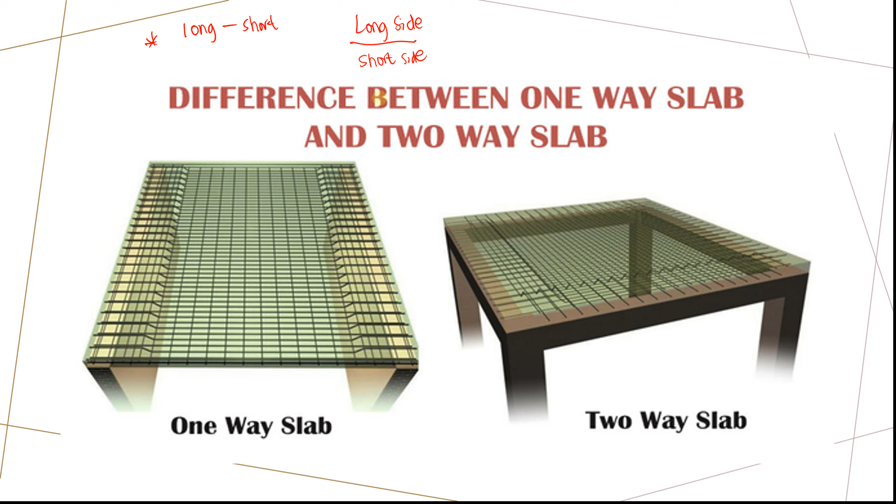If ang long side, divide nimo sa short side, and then the result is greater than 2, then use one way. Or kung imo ning balihon, no, the short side divided by the long side, and then if ang result is less than 0.5, then use one way. Else, greater than 0.5, then use two way.

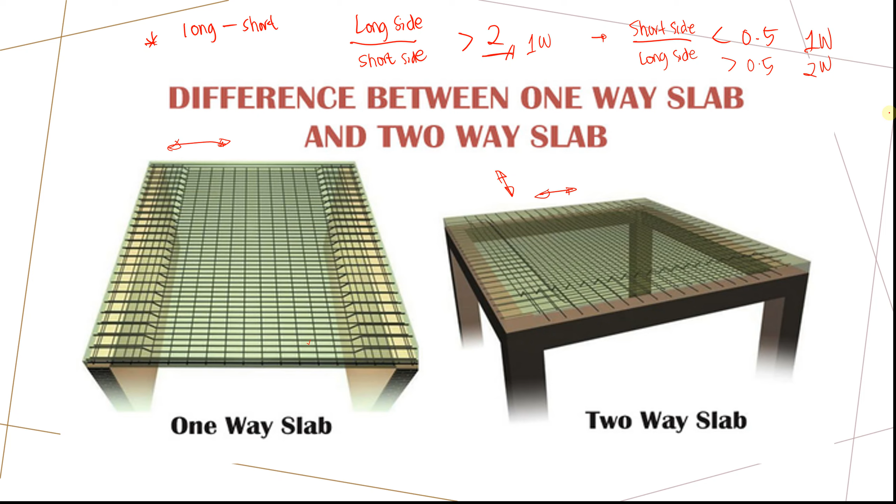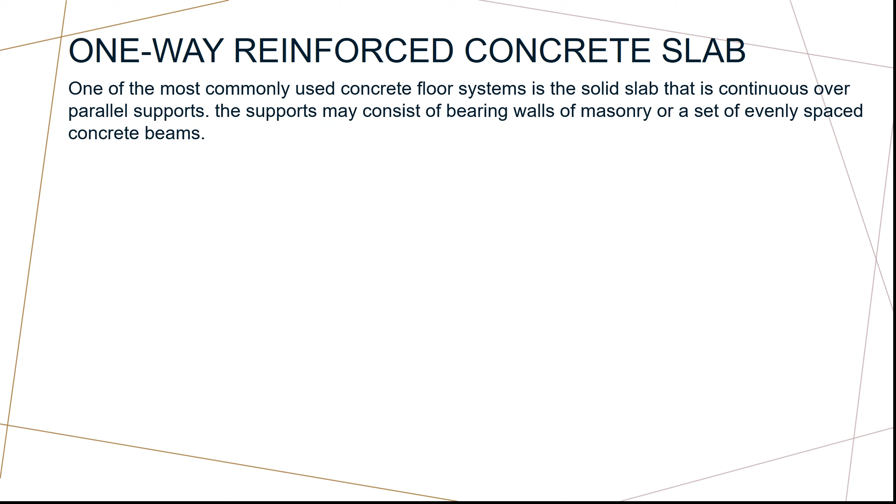Mao na ilang kalainan. So one of the most commonly used concrete floor systems is the solid slab that is continuous over parallel supports. The supports may consist of bearing walls of masonry or a set of evenly spaced concrete beams. So mao na siya ang itsura, no? This is a one-way slab. Example, this is the section view, and then this is the detail plan or the plan view.

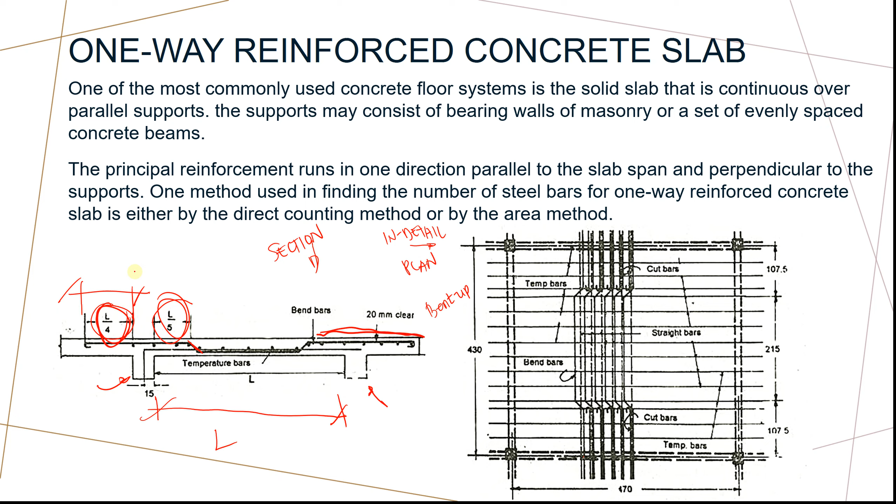And then what else? Temperature bars. So kani sila, all throughout the length, perpendicular to the direction of the main bars. For the one way, ginatawag nato og temperature bars. Tapos as you can see, naa'y beam diri, mo-extend ni siya diri. Ang length of extension is L over 4. Unsa man ni si L? That is the clear span. So L over 4, that is the extension. And then the location of the bend is at L over 5.

So aron masabtan, diretso ta 12.1 by direct counting method. Actually ang slab is direct counting method. So 12 mm daw ang steel bars nga gigamit. Reinforcing steel, and actually naa pay given ani wala lang napakita diri. Ang main bars, ang spacing is 0.15 meters, while ang temperature bars, ang spacing kay times 2, 0.3 meters. What else? 12 mm bars. Okay.

First is determine the length of main bars. So naa tay duha ka main bars. Naa tay straight bars, naa pod tay bent up bars. So first is pila man kabuok ang main reinforcements. So kani nga length, that is 4.7 meters or 470 centimeters. That is center to center. Now ang L is minus sa beam. Ang katunga sa beam is 0.15 meters. So minus 0.15 on this side and minus 0.15 on this side. So the L is 4.4 meters.

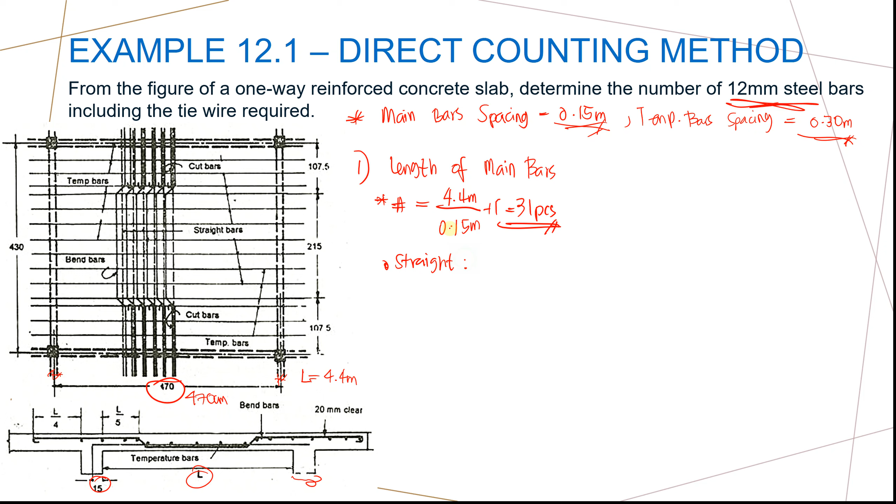First, kuhaon nato pila ka main bars. So that is just 4.4 meters divided by the spacing of the main bars. So round up to the whole number, that is 30 pieces. Spacing, by the way, plus 1. Let me erase this one. Diretso na, no? Plus 1. So we have 31 pieces. This is the combination of straight bars and bent bars.

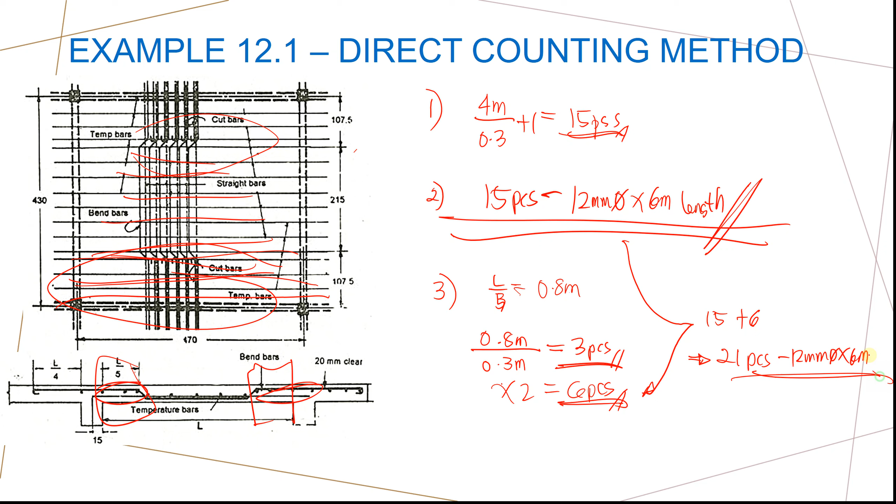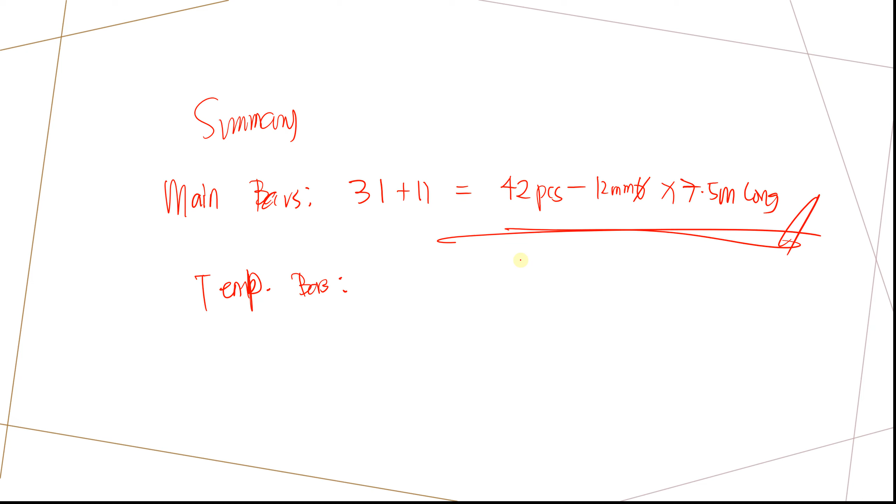So, let's just summarize that. For the main bars, kinahanglan ta og 31 plus 11, that is equal to 42 pieces of 12 millimeter diameter by, not 6 meters, but 7.5 meters long na bar. And for the temperature bars, we need a total of 21 pieces of 12 millimeter diameter by 6 meter long na bar. Yan na siya.

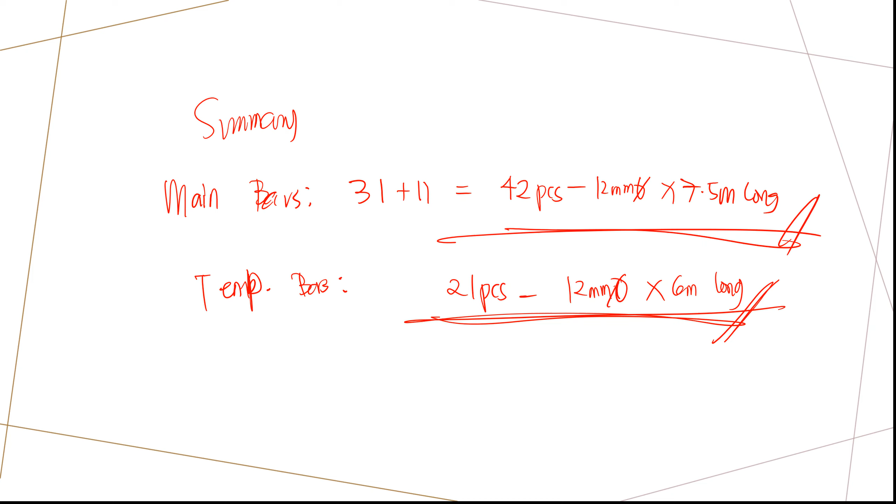Next, we're going to discuss the area method. Okay, the area method is mas dali.